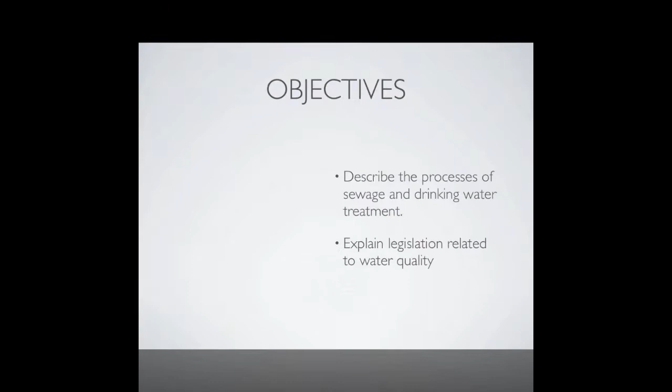We've been talking about water pollution, so the topic for the day is actually going to be water treatment and legislation. As always, let me get you some objectives, and then we'll jump on in. By the end of this video, you should be able to describe the process of sewage and drinking water treatment, and you should be able to explain legislation related to water quality.

So, over the last several videos, we've been talking about all of the things that humans do to water or the things that can be in water that harm humans. Today, we're going to talk about ways to clean that up and prevent it. Starting out, we're going to have three processes that you need to know about. You need to know about a septic system, sewage treatment and drinking water treatment, and the manure lagoon. And then we'll wrap up with legislation that is aimed at protecting water supplies.

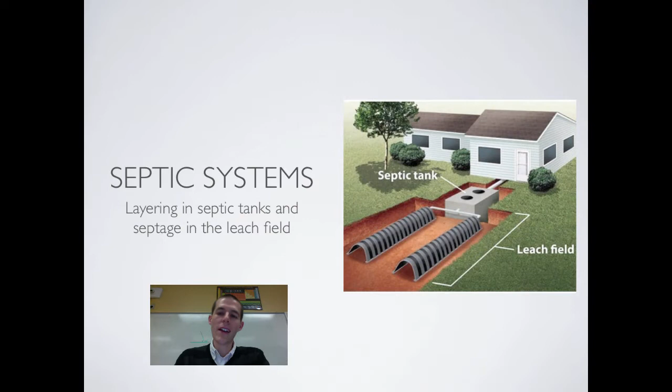So, jumping on in and talking about a septic system. First thing you need to know about septic systems is that they're used in areas where people have got fairly large lots of land, because it takes a good amount of land to properly utilize a septic system. There's a couple of parts you need to know about: the septic tank and the leach field. I'm going to draw you a little diagram to give you an idea of how this works.

So here's our house. The house is putting out wastewater from toilets and sinks and drains and whatever else. This water flows into the septic tank. Once the water is in the septic tank, it essentially separates into three layers. Everything that's heavier than the water settles down to the bottom, and this becomes sludge, like solids and heavy particles. Anything that is lighter than water rises up to the top, and that becomes scum. And then you've got your water in the middle.

All of this sludge at the bottom, bacteria and organisms over time will break down that organic material, but every 5 to 10 years, this has to be pumped out. Scum on the top, again, bacteria is going to break that down. This water flows out into what's called a leach field, which is basically a series of pipes underneath the lawn or the ground behind the home. Water will slowly seep into the pipes in the leach field. These pipes have little tiny holes in them, and that water will leak out into the surrounding ground and grass.

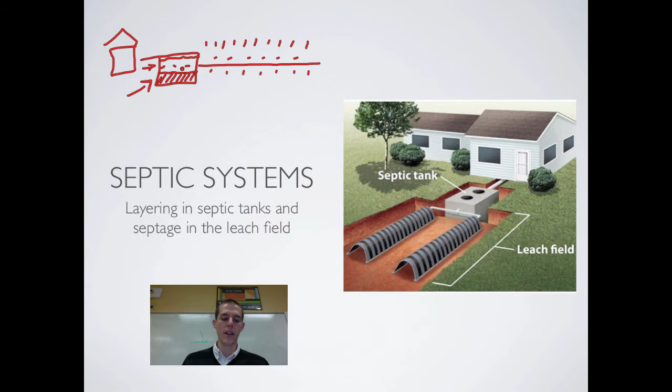Now, obviously, in big city areas, people don't have enough land to have a septic tank and a leach field behind their house. So for cities, their best bet is to set up a large-scale sewage treatment plant. I'm going to walk you through the steps. It all starts out with underground pipes carrying waste away from homes, so you've got your sewer system flowing underneath the streets and houses of the city. In water treatment, there are usually a couple of different treatment levels. We always start with primary treatment, then secondary, and in some cases tertiary treatment.

As our sewage comes in, first you've got screens that take out the big debris, any really large material that can be filtered out with a screen. That material will then be carried away to a landfill. After the water has been screened, you get to primary treatment. In primary treatment, you've basically got a big holding lagoon, where the water sits still for a while. As it sits still, more of the solid waste settles to the bottom. This is known as sludge, and that sludge is going to be collected.

It is going to be taken to another facility where water is removed from it. As the water is removed from it, that water is going to go back into the treatment process. The concentrated and dried sludge will be thickened, and then it will be transported away and used as a fertilizer. It could be dried and compressed into fuel pellets. There's a lot of things you can use it for, but that is one destination for the sludge.

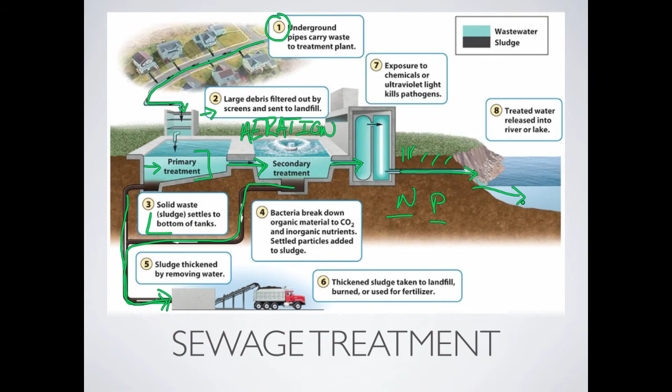This is drinking water treatment, which is pretty similar, but I'm going to walk you through it so you know. If we are talking about drinking water, we're going to talk about water that's usually taken from a natural body of water. You first screen it to take out any large sticks and twigs and grasses and whatever else. Once it goes through that initial screening, a couple of chemicals get pumped into it. One is potassium permanganate, the other one is a coagulant, and basically what happens is coagulant takes any sediment and stuff and makes it clump together.

Those clumps are then big enough that they can settle out in this coagulation chamber, and this sediment right here is going to be taken away and dried and pressed and carried away just like the sludge in our last treatment process. After coagulation, the clean water is taken on and is first treated with chlorine. Chlorine is going to kill a lot of the bacteria and the pathogens in that water.

We are then going to filter it again. This time, this water is going to go through an anthracite filter. It's going to travel through sand, it's going to travel through gravel, so it's going to get rid of any further grit, any small sediments, it's going to get rid of any other pathogens.

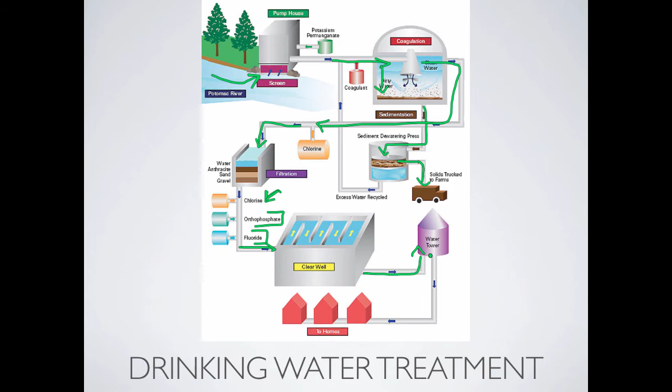After it's gone through that, we're going to finish disinfecting it. We're going to throw some chlorine into it. That's going to kill any remaining pathogens. We might throw some orthophosphate in it, and then we're going to put fluoride in it to take care of people's teeth. Once it gets to this area, it is now clean, and it can be pumped out into the city water supply for use of all the people in the city.

Final water treatment thing, or consideration you need to know about, is legal dumping. Now, interesting thing about the way laws are set up around America's water treatment plants. A lot of times stormwater, so that's going to be water that runs into the sewer during a rainstorm, travels through wastewater plants. When you get a big rainstorm and you've got a city going full blast, the water from the rainstorm plus the sewage from the city often overwhelms old water treatment plants.

In cases like that, the water treatment plant is legally allowed to dump its raw sewage into the nearest body of water. So this means that if there's a big rainstorm, the gates go open, any raw sewage that is in that water treatment plant flows out with the rest of the water into rivers, lakes, and streams. This makes millions of people sick a year. It's a result of water treatment plants that are out of date or not able to handle the capacity, but be aware that during big rainstorms, water treatment companies are allowed to just dump their waste into big bodies of water.

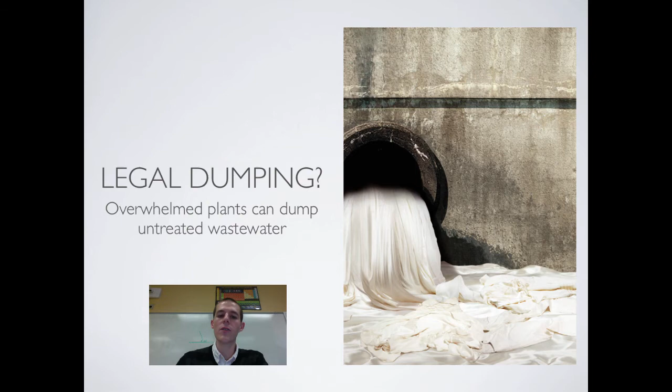Final water treatment consideration to be aware of is a feedlot and a manure lagoon. So just like when you've got a bunch of people living together producing a ton of waste that has to be dealt with, when you've got a bunch of animals living together, same problem. A bunch of cows, chickens, pigs, whatever. If you've got them in a concentrated feeding operation, which we'll talk about in later videos, they produce tons and tons and tons of waste.

And the way their waste is dealt with is through manure lagoons. So basically a manure lagoon is a pit that is lined with rubber to prevent leakage. The manure and waste is pumped into this lagoon. As it sits in this lagoon, naturally occurring bacteria is going to break down the waste. Whatever sludge is left over is going to be pumped out and treated and used as fertilizer. This water will then be pushed off to other sources.

One of the major problems with feedlots and manure lagoons is two things. One is if there is a crack in the lining on the bottom, all of this wastewater and sewage can seep into your groundwater supply, contaminating it. Obviously, that's a big problem. Another big problem is if there's a huge rainstorm or something like this, all of this sewage in this pond could overflow onto nearby land, homes, farms, whatever. So, two considerations to be aware of with feedlots and manure lagoons.

And we're going to wrap up today with a little discussion about legislation. There are two pieces of American water quality legislation you need to know: the Clean Water Act and the Safe Drinking Water Act. So the Clean Water Act started out in 1948, was significantly expanded in 1972. Major things you need to know about it is it deals with the chemical, physical, and biological properties of natural water. It deals mostly with surface water, though it's being expanded now to include groundwater.

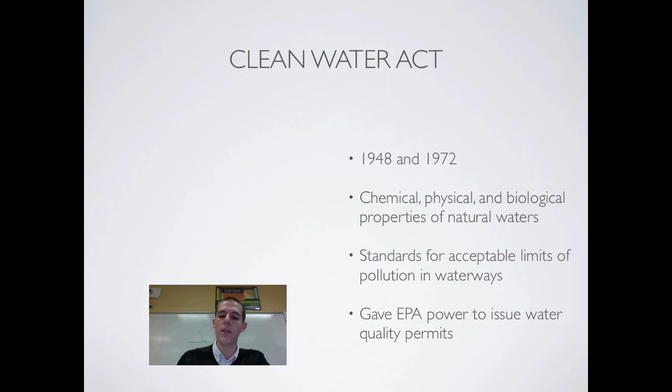So before the Clean Water Act, the EPA didn't really have the power to do anything when it came to water quality. Now they do. So the Clean Water Act, know that that is surface waters, acceptable limits of chemicals, and it gives the EPA power to issue water quality permits.

Then for our purpose, the Safe Drinking Water Act started in 1974, was expanded in 1986 and 1996. The big thing it did was to establish maximum contaminant levels for 77 different chemicals. Now, for each of those 77 chemicals, there is a limit on the EPA books that says in the drinking water that we have, this is the maximum contaminant level, or the maximum amount of this contaminant that can be present in the water. Contaminants could be biological pathogens, industrial chemicals, pesticides, whatever.

Now, one of the difficult things with the Safe Drinking Water Act is that this list of 77 regulated chemicals is subject to political pressures. So if an industry feels like it's going to cost them too much or be too difficult for them to lower the amount of a chemical they're putting into waterways, they can lobby the government and get the EPA to set a higher limit that may or may not be safe.

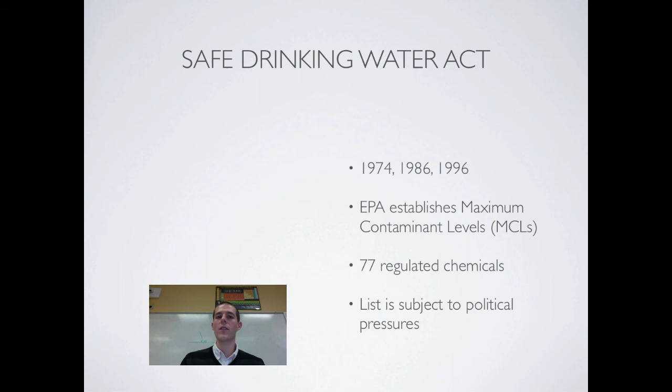So that is the Safe Drinking Water Act. Make sure that you keep it separate from the Clean Water Act. The Safe Drinking Water Act is about our drinking water and has maximum contaminant levels. The Clean Water Act is about surface waters out of doors.

Final thing, and as we talk about all the time, there's a major divide between water quality issues in the developing world and in the developed world. We've mentioned before that in the developing world there's about 1 billion people that don't have access to clean water. In industrialized nations, basically the way the process went is as the country industrialized, water got super polluted, people got angry that the water was polluted, legislation and processes were put in place, and the water was cleaned up.

In countries that have not yet developed, they are in the stage where they are polluting their water, but they don't have the resources or the political power or a stable government to be able to put legislation and water treatment practices in place. Also, it doesn't help that developed countries often ship our polluting manufacturing off to the developing world, so they deal with the problem of our water pollution and we don't have to deal with it. So be aware that, as with many other things we've talked about in this class, there's a great divide between the developed and the developing world.

And with that, I think we're done with our series on water.